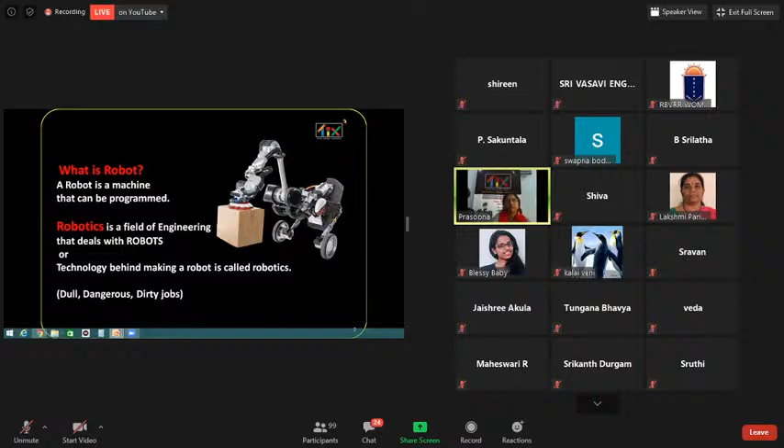And what are the types of robots? We'll see three types here: bots, chatbots, and robots.

Bots means these are virtual bots, usually seen in internet and web browsing. This is called e-bots, completely automated bots. It's a kind of software application; we won't see a physical form, but behind the e-bots, Google search and browsing, it will find the index for us.

Whatever we are searching, such kind of word, those bots will find out all the related index for us. And this acts without human, with human instructions and without human interference, and it replaces humans' users' behavior.

For example, like web crawling, and usually we'll see it used to analyze information like big data analytics and e-commerce kind of applications.

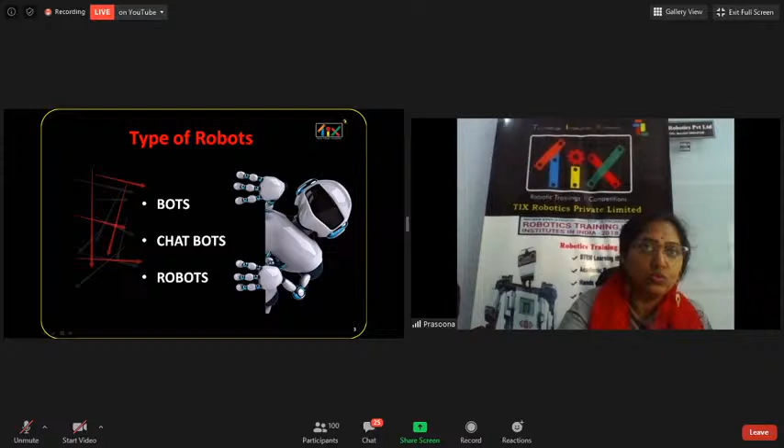And these include two types: one is messaging, and voice bots. So voice bots are like Siri, Google Assistant, and Alexa kind of.

So it interacts with humans and behaves like a human, and those are also called robots in a virtual form. The third one is robots — these are the robots which are in physical form, like we usually think robots are only these.

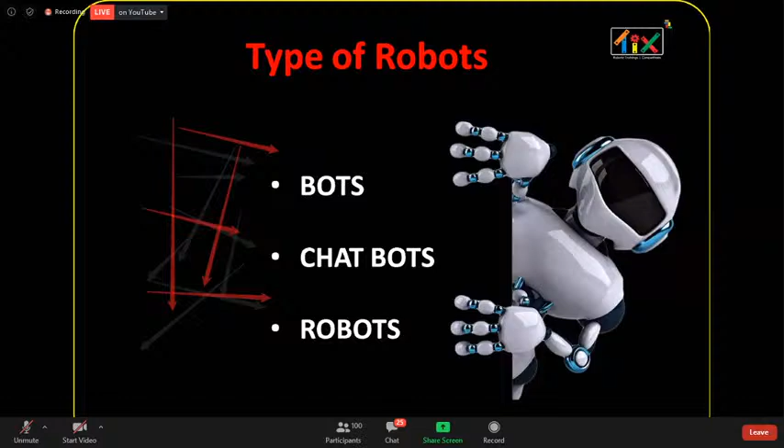And today we'll talk mainly about robots — the use of robots in daily life. Almost everywhere, in all fields, robots are occupied: whether it is agriculture, rough and open environment jobs, hygiene and medical condition jobs, heavy jobs like in industries, or hazardous jobs in militaries.

And the education sector — how to work with robots, how to use robots, what is the technology behind robots. So all those we will understand in the education field.

So if you see agriculture, how we can use robots — for example, with the help of sensors we can detect the soil quality and help farmers, and detect soil moisture levels, we can make automated watering. There are many applications in agriculture.

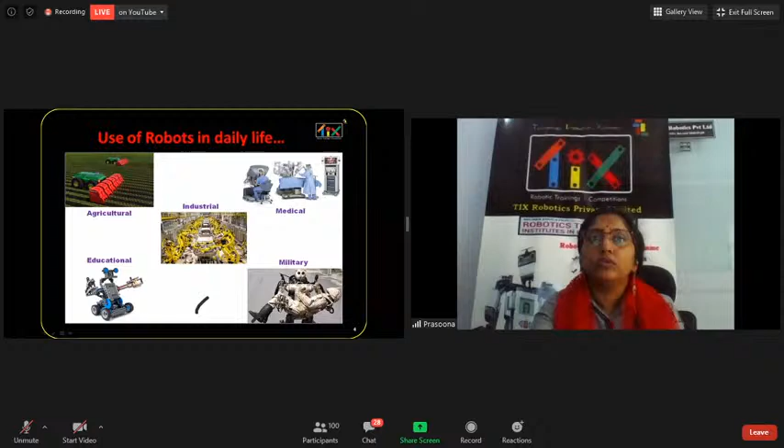And when you come to industries — as I told you about education — at the industrial level we can make autonomous robots for manufacturing industries. And if you see aerospace, military, and hazardous security services, human-like robots can be made for those fields too.

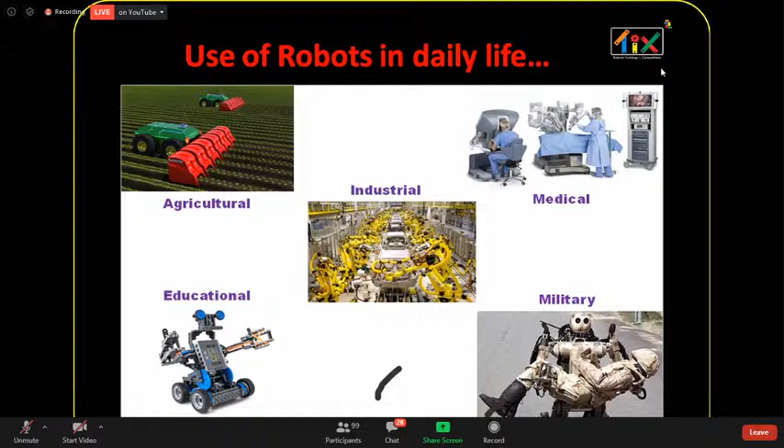I think most of you know about the robot Sophia. Sophia is the first humanoid robot. Till now we were helping humans, acting like humans, behaving like humans, but here we came up with artificial intelligence — the robot has the capability to take decisions, understand, and answer accordingly.

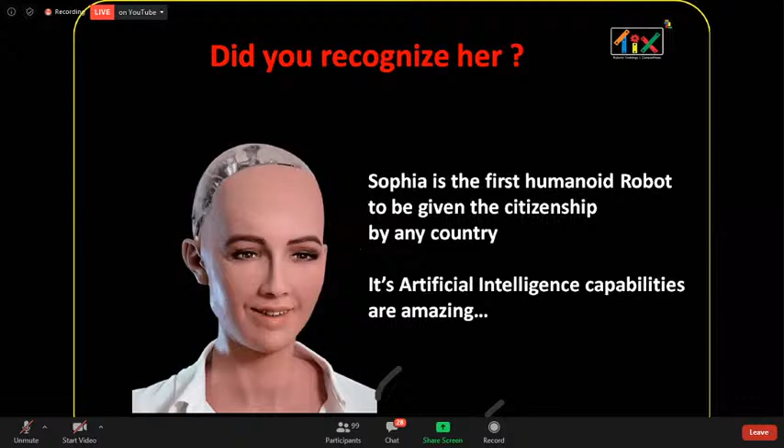So this humanoid robot we treated as a human, and it was even given citizenship. And it's purely AI, artificial intelligence.

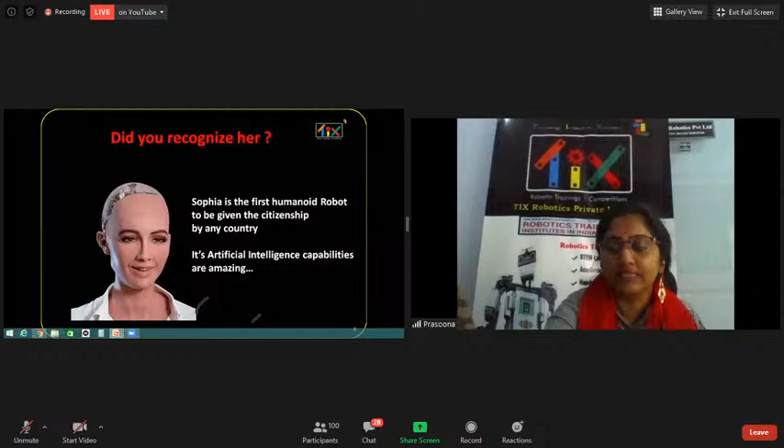Robots are also used in the entertainment field, animation industry, and cinema, and some robots even went to space — if you see the Mars rover, that's the robot which went to Mars, and it completely works autonomously without human interference.

So it's completely independent; complete high-level technologies are used here. The rover even takes decisions by itself. And some of the satellites — like Voyager, the smallest satellite, which even went out of our solar system recently, has been going on for the past 30 years, still sending all the information to Earth.

These kinds of higher technologies are where we are using robotics.

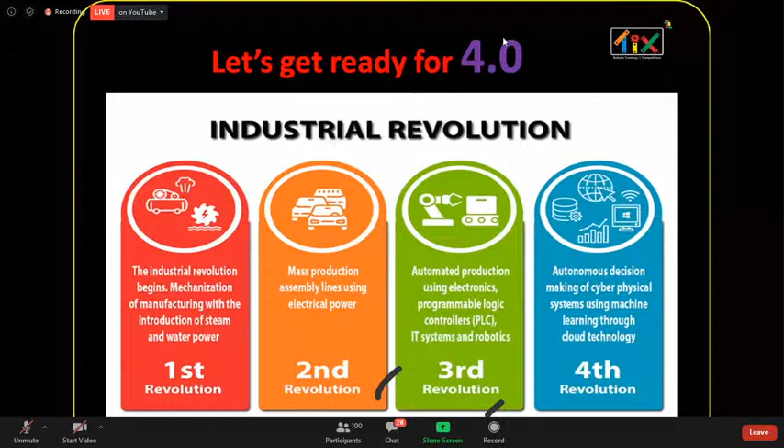We have done with the introduction and fields, and wherever the careers we can.

And the third revolution is the computer revolution, 1990s. We all know we are part of that revolution. Before computers and after computers, how our life got changed, we understood that.

And India's participation, we adopted that revolution a little late, but once we adopted, we created the biggest leap over there. So we created many software engineers who can give service to the world. So here we created more employees.

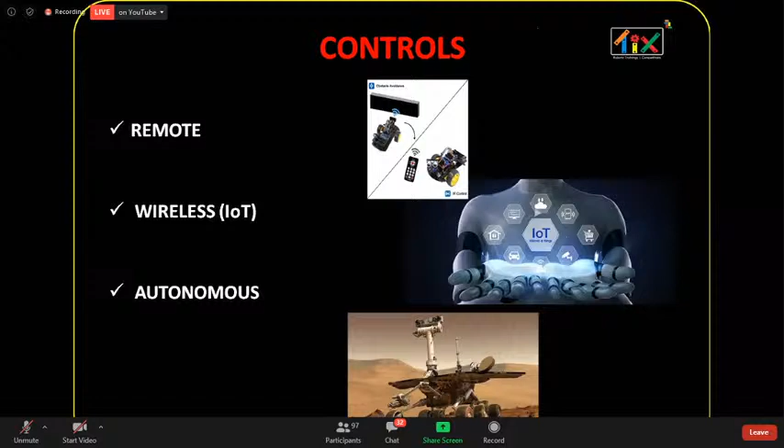And programming wise, we have block programming. A set of instructions will be in one block, and it's easy to program and understand. In graphical programming, it is a graphical way, no text over there. It is also a set of instructions in one's graphic, and it is really very easy to operate.

And next is text-based. So usually we go with text-based: C, C++, Java, Python, and ROS usually we can use. And I strongly recommend C and Python. If you are at a student level, better to have a grip on C language. It's going to help you in many ways.

So advanced robotic technologies and careers in AI - artificial intelligence, machine learning, big data, IoT, AR/VR - augmented reality and virtual reality, image processing, nanotechnology, and biotechnology.

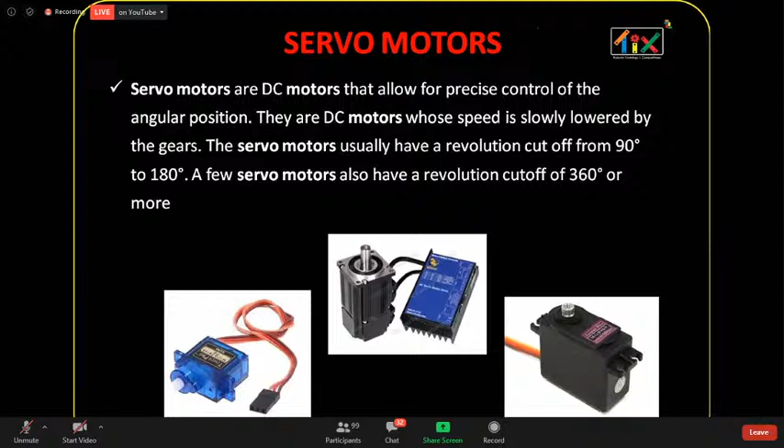And we're giving here some idea about the sensors. Arduino and Raspberry Pi have already given you a vast variety of sensors, like ultrasonic sensor, moisture sensor, infrared sensor, temperature sensor, and motion sensor. Some companies are ready to make that kind of sensors, so you have thousands of varieties of sensors.

A sensor is a device which will take the input, meaning data. It doesn't really do the work like motors, it takes the data in.

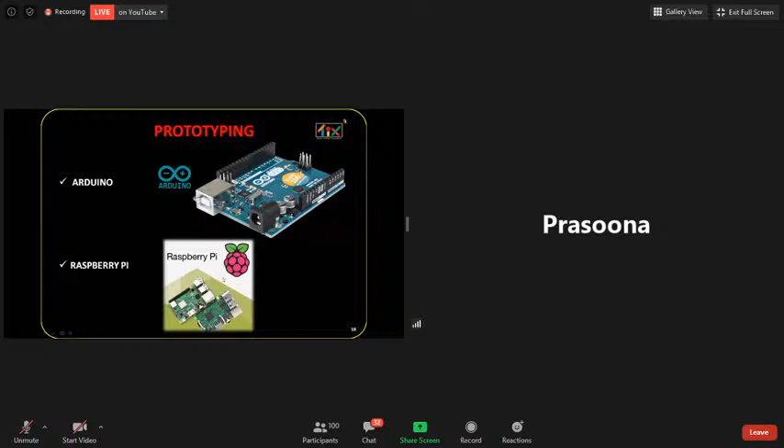Not only prototypes, you can even make real kind of robots. In 80% of the robots you can make with these controllers. I strongly recommend don't go with any other controllers, better to go with these two.

It gives the data to the controller, the controller takes it as input, and it gives a signal to the motor so that it can rotate. So here you have unlimited options, you can upgrade this project. It's a kind of basic project, here we would like to show one input and output.

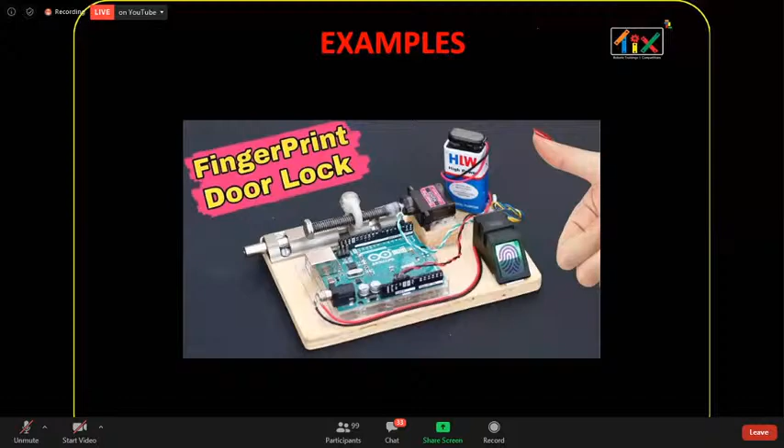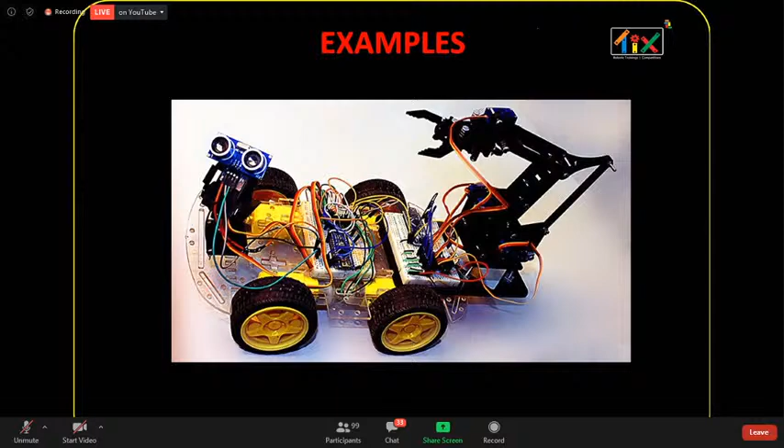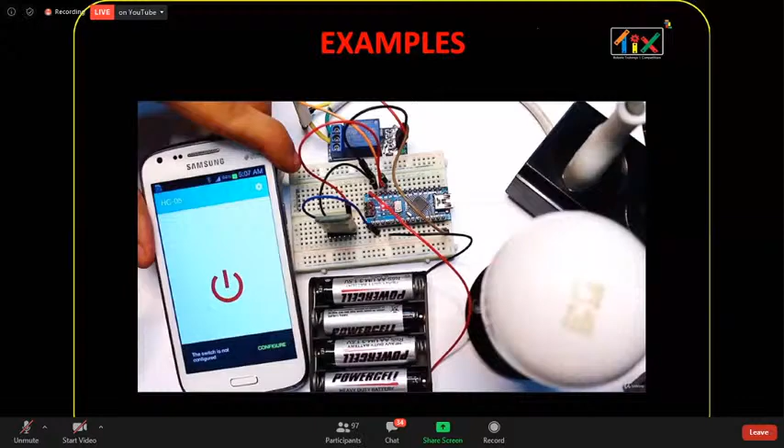So TICS Robotics, we usually give a basic understanding on robotics, and hands-on trainings. So Arduino level 1, where you'll understand how to interface motors, and Arduino level 2, how to interface sensors. Once you understand these two concepts, based on your creativity you can do a number of projects. Once you have the complete idea, then you can explore.

So Arduino certification, this is an original Arduino from Italy certification program. And Raspberry Pi level 1 and 2. Raspberry Pi level 2 is about all the sensors, level 1 is about motors, how to interface and work. And we work with robotics, doing robotic arms, 3D printing, drones, and how to control our robots with Alexa voice.

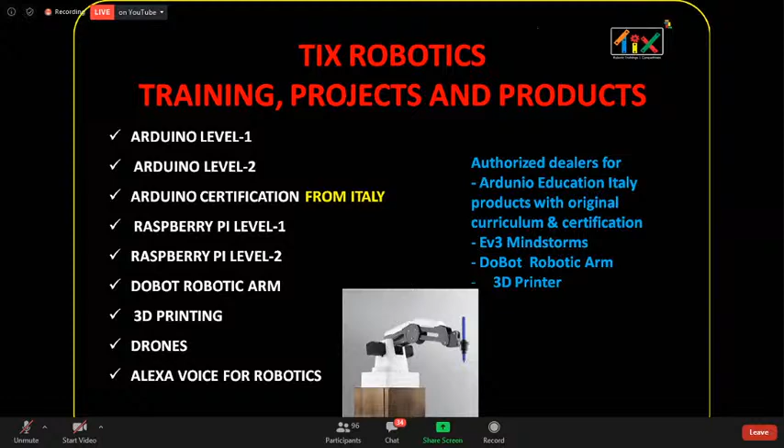So once you've got the knowledge and idea about robotics, you practice some work and made some prototypes. We feel that competitions and exhibitions are the platforms where you really apply your skills. When a teacher is teaching, that doesn't mean you learned everything. You feel you learned everything, but when you come to robotics, definitely no. When you apply your skills, whatever you learned, then you come under reality. That is most important, we feel.

So once you understood all the concepts and got hands-on experience, better to go with your product to exhibitions and competitions. Exhibitions like Makers Fairs, many IITs, triple IITs, Techno Fairs kind of events. Go and participate and see how you are doing, how others are doing, where you are located knowledge-wise, and how to improve yourself.

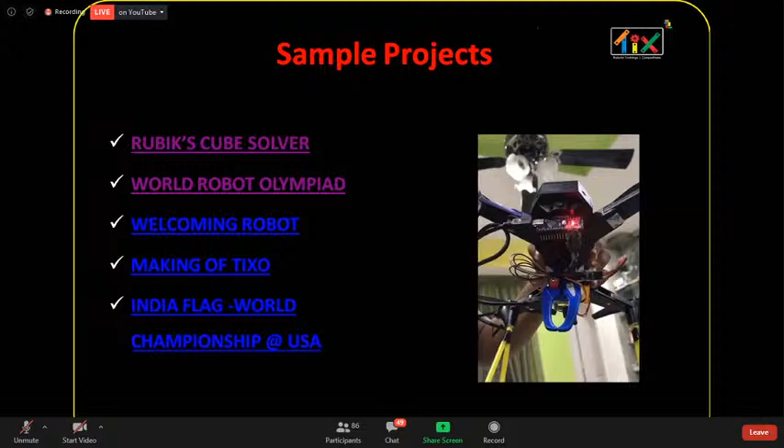Motion sensor - for example CC cameras are there. So whenever a person is moving, the CC camera detects that motion and takes a picture of that person. So motion sensor detects whatever motion comes in front of it and collects the data.

For example, in front of our house, someone came and sometimes we want to open the door and sometimes we don't. So when the sensor detects a person, it collects the data - this person came, took pictures of us. If it is our parents or our children, we would like to open. So we can give that data to the controller: if this person came, open the door; if that person came, don't open. Like that, we can give the commands.

One more question, ma'am. Hello. Yes, can I ask - what are the opportunities for mechanical engineering students, ma'am, in this field? So I told you, right, CAD plays a very big role in the mechanical stream.

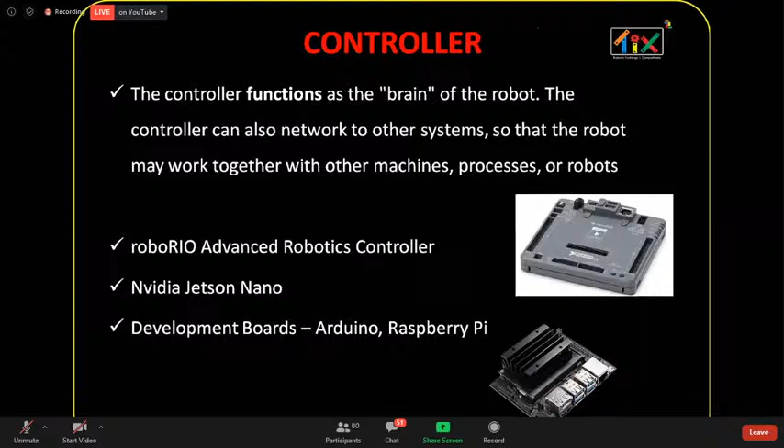So they can make mechanisms. They can do mechanisms - like a robot, if you go to the industrial side, it has to pull the object or push the object or slide the object, or it has to hold and pick in some other way. So all these we need mechanisms. So the physical part of a robot definitely needs mechanical stream help.

Before any robot we plan, mechanical stream people have to design the whole robot model in CAD and do simulation. Making these mechanisms is a very big role, because people actually look at that part only - no one will see electronics or electrical or programming. At the same time, what kind of metals they have to use - metallurgy kind of thing - what kind of metal we have to use if we are holding hard objects, heavy objects. That's based on them.

Thank you, ma'am. One more question, ma'am - do we have any online training in this lockdown time, ma'am, related to robotics? Many will say online courses, but especially when you come to robotics, hands-on is very important.

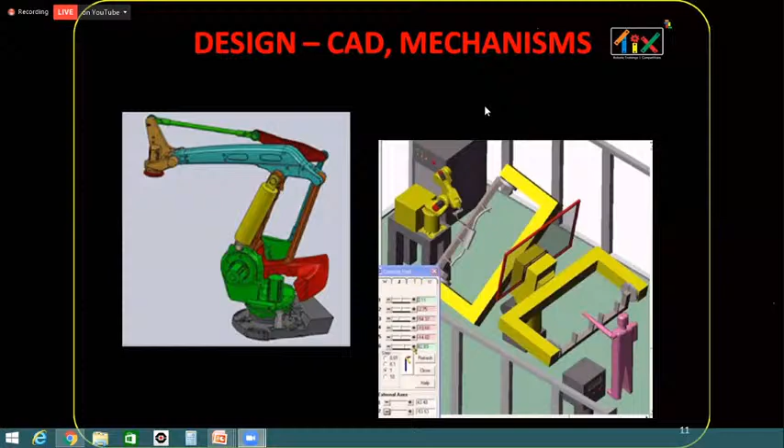One more question, madam. For a basic project, how much will be the expenditure, madam? They want to know, if they want to do a project, what is the expenditure? Basic expenditure - within 500 rupees is enough to start. Nowadays engineering students are doing projects, ma'am, for small requirements.

Hello. Hello, Prasoona madam. Yes, madam, one sir has a doubt, madam. Sir will ask it seems. Participants are muted, Swapna, they can ask now. I'll unmute this sir. Hello sir, good afternoon ma'am. You can ask sir, madam is on. Thank you for unmuting, ma'am.

Madam, due to these technologies and robotics, nowadays everyone is depending on technologies and robotics, all computer system-based. So is our IQ level increasing or decreasing? Because in the past, if we wanted to do something, we would try with our mindset, use our brain. But nowadays, if we want any solution, we just do Googling. So is our IQ level increasing or decreasing, if we take a sample of 100 members?

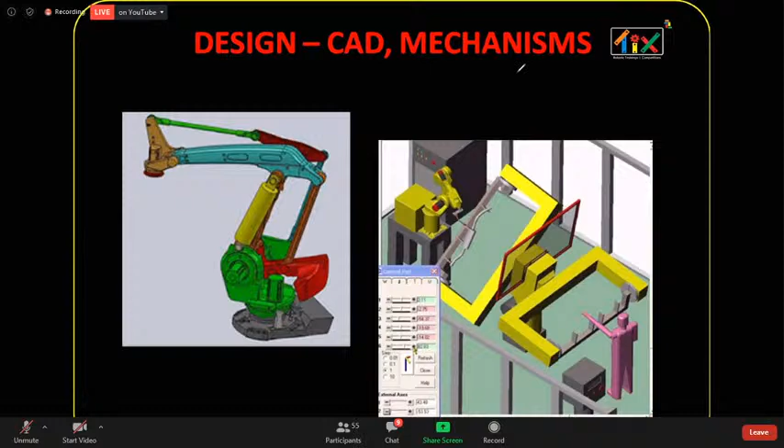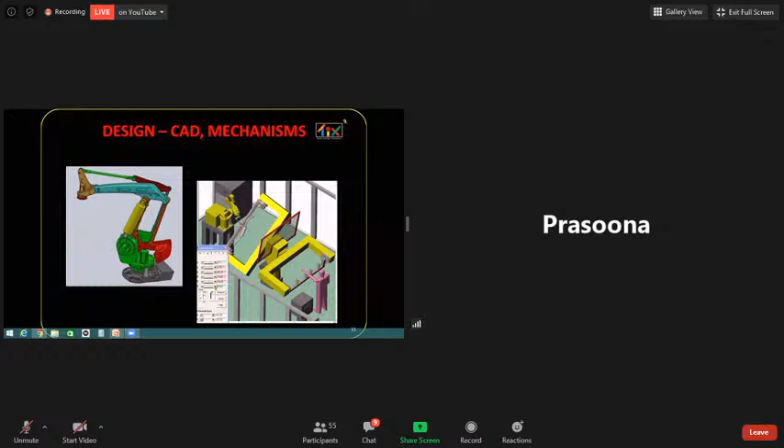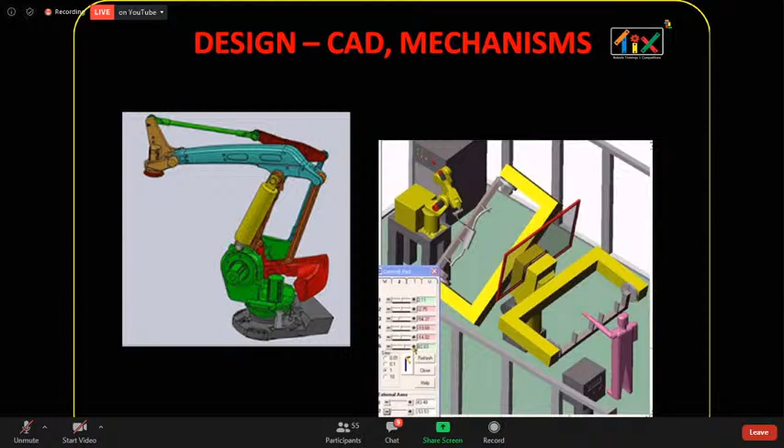In space technologies, they're using a higher level of technologies over there. The space field has a very, very big scope, so to understand the quantum physics, especially when you come to India, ISRO is playing a very big role. Space, that's the ultimate goal we have to keep when you are in this field.